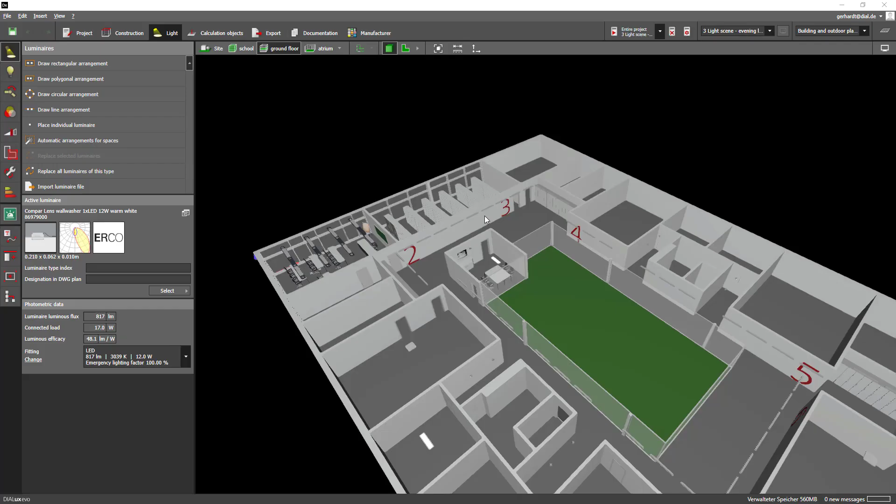First, I'm opening an already existing project, namely that of a school building. In the next step, I will place an escape route in these aisles. In order to do so, I have to switch to the calculation objects mode, which you can find right here. From there, move to the Emergency Surfaces tool, which you can find in the menu on the left.

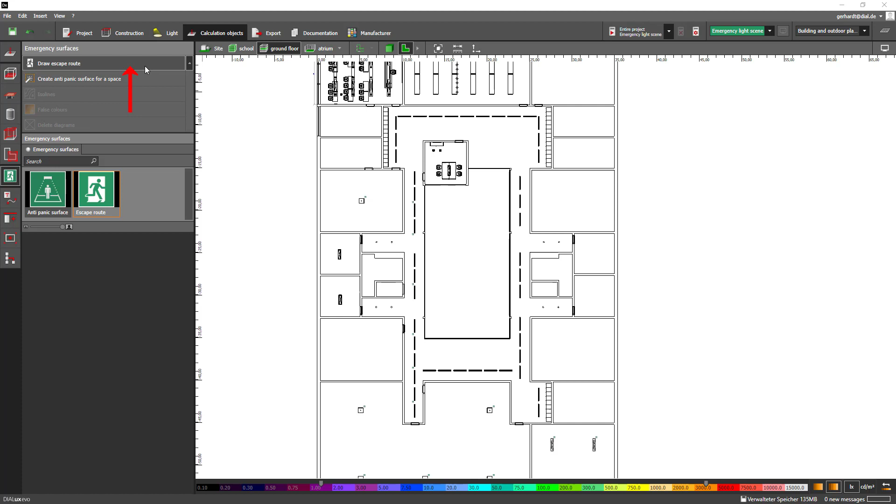Then select the option Draw Escape Route. Start drawing the escape route by choosing a starting point that seems right for you. I start down here, in the middle of this aisle, and pull up to here to set my first waypoint. Then I turn to the right.

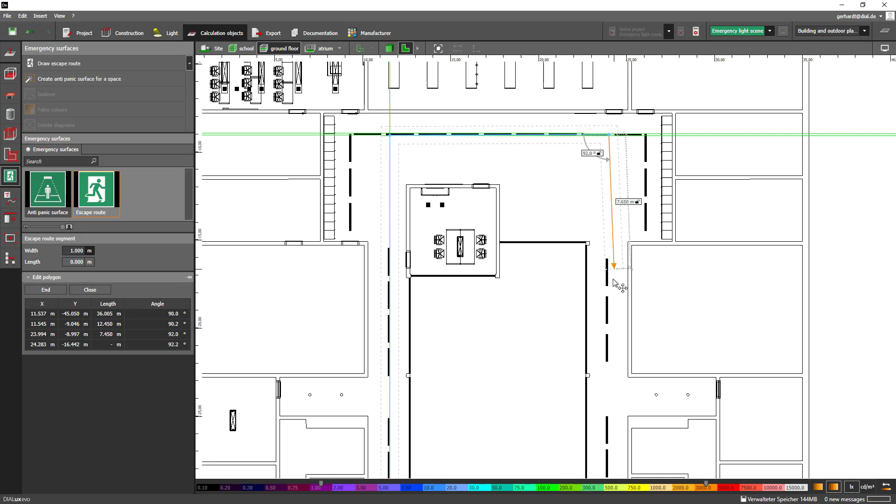And close the emergency route by right-clicking and choosing End. You can of course place multiple escape routes in DIALux evo. Let me quickly demonstrate that to you.

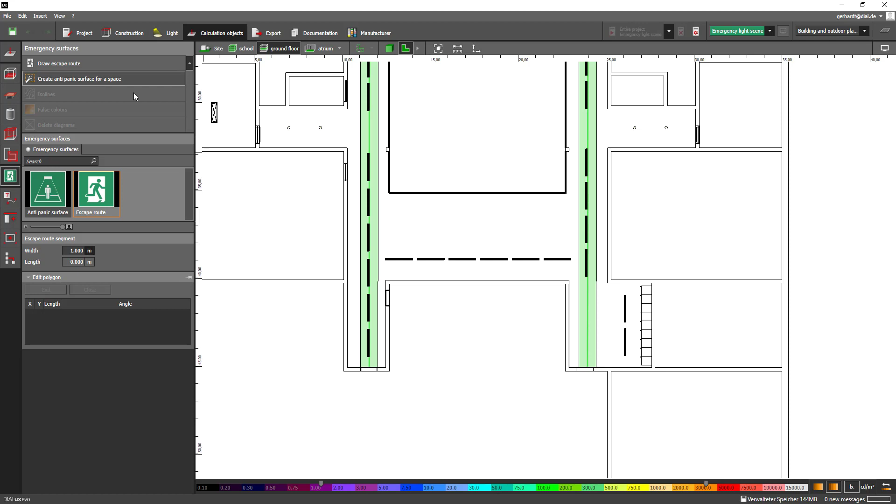I start in the aisle on the left and pull the route all the way over to the aisle on the right. What you'll notice is that when the center lines of these two escape routes touch, they merge into one escape route with several segments. This way, junctions and crossings can be created, which is very useful.

In the next step, we'll take a look at the luminaires. Let's switch to the light mode and the emergency luminaires tool.

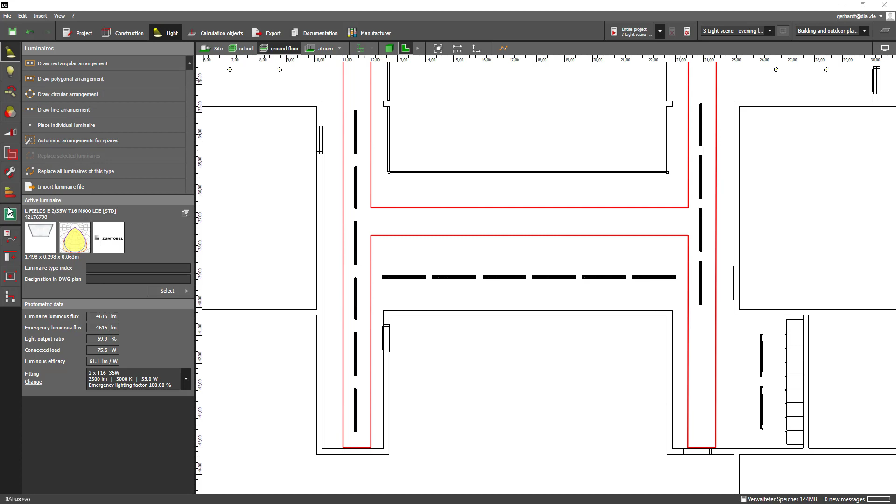I then, let's say, select this luminaire and specify it as an emergency luminaire by clicking on this button right here, which reads Use as Emergency Luminaire. On a side note, you will always recognize the emergency luminaire by this small icon.

Next, we turn on the false color preview in the side menu and get a real-time visualization of the expected results of our luminaire. What is great is the fact that I can now select this luminaire and move it along the aisle, and you'll see that the expected results change in real time.

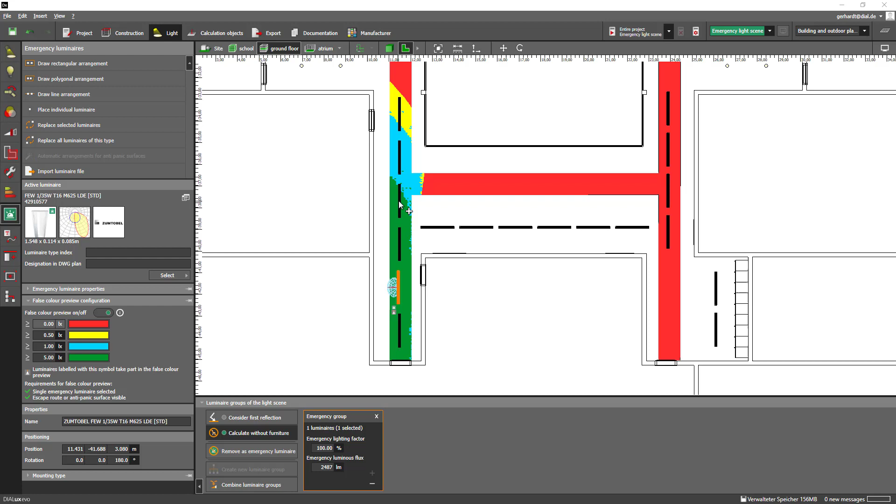You can of course make changes to the values and colors as you wish in the false color preview tool. It is also possible to define more than one luminaire as an emergency luminaire. Just select the desired number of luminaires and define them as emergency luminaires by clicking again on the Use as Emergency Luminaire button below.

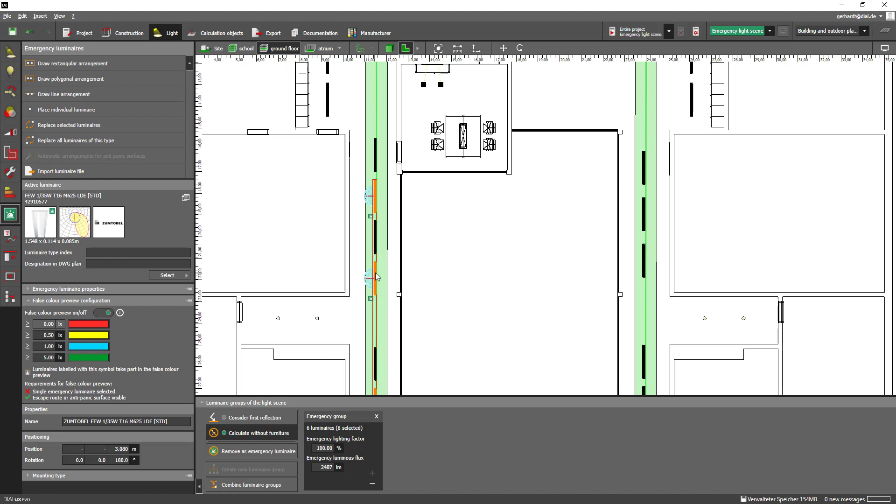And as you can see, you immediately get the expected results as a preview too.

Next thing I want to show you is the placing of an anti-panic surface. In order to do this, go to the Calculation Objects mode. Select the anti-panic surface option here, then choose the designated room for the placement of the anti-panic surface.

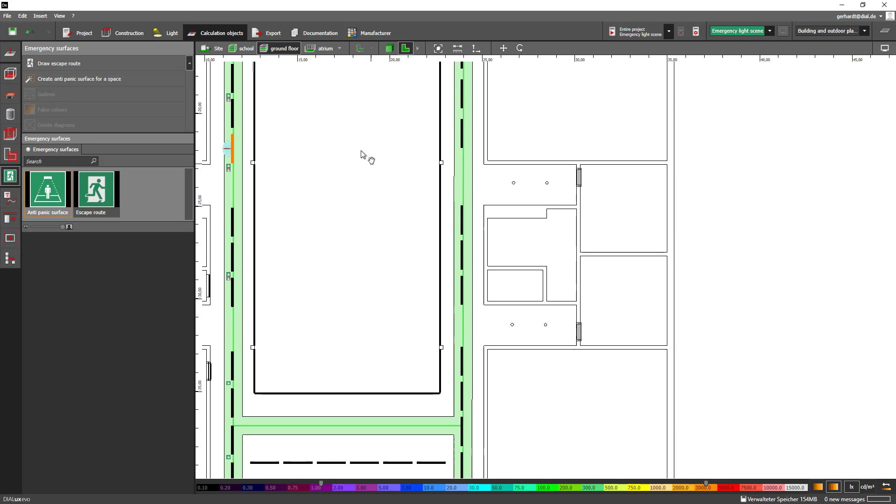After that, select the action Create Anti-Panic Surface for a space on the left side. By left-clicking in the room, the anti-panic surface is automatically created.

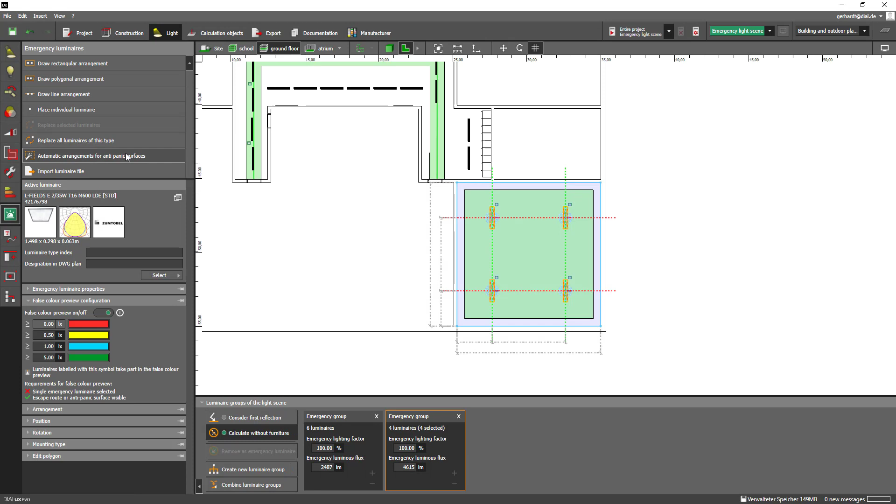After that is done, I go back to the light mode, then I come down here and select the action Automatic Arrangements for Anti-Panic Surfaces. And there you have it. 4 luminaires have been added to the room and to the anti-panic surface respectively.

You may wonder why 4 luminaires in particular were added to the anti-panic surface. Let me answer that question for you. The automatic arrangement tries to achieve the specified minimum values and the required uniformity with the current luminaires, as far as the selected luminaires allow.

Okay, now let's have a look at the calculation settings. Up here you now have the possibility to calculate your standard light scenes and the emergency light scene, which is indicated by the green background, separately. In addition, you can now calculate not only all light scenes but also only the active light scene.

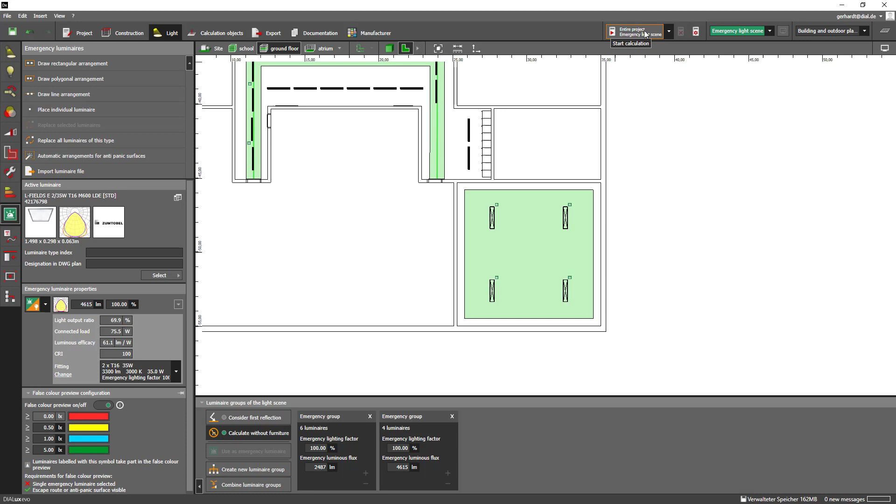Let's try it, shall we? It will only take a moment and you will have your results as per usual in the results overview on the right side. Now let's take a look at what's new in the documentation.

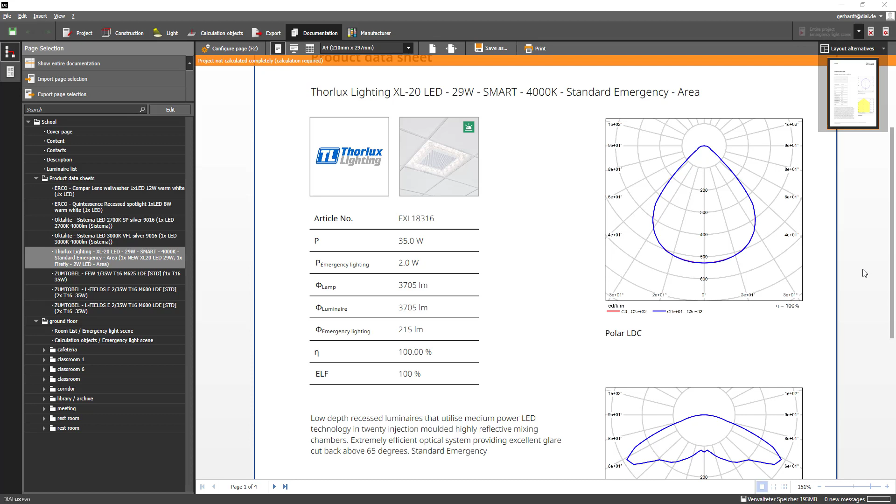The product datasheet has been updated to include the characteristics of the emergency luminaire, namely the emergency luminous flux and the emergency lighting factor. You now also get a revised luminaire list, as well as a luminaire layout plan with all your placed emergency luminaires.

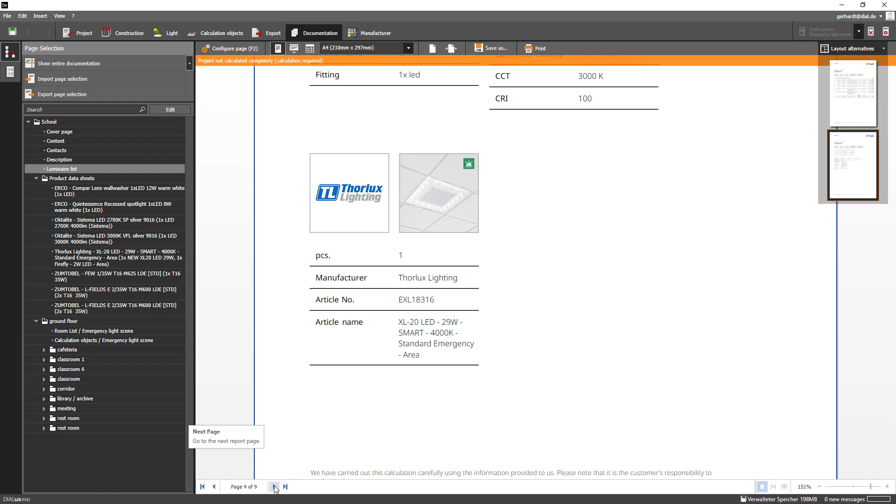In addition to that, you get the individual calculation results of the placed calculation objects and a room summary with the results of the calculation objects.